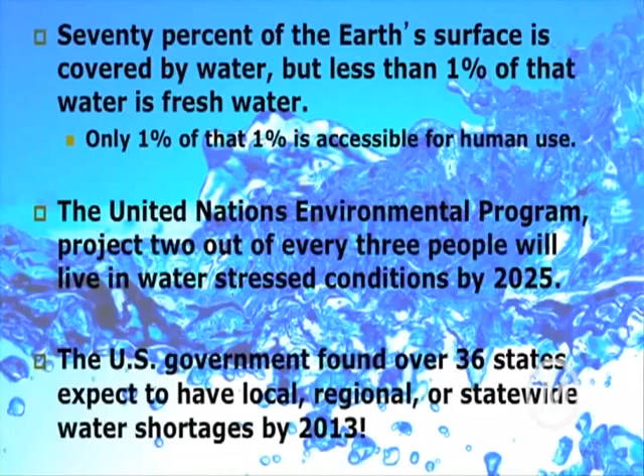The United Nations Environmental Program projects 2 out of every 3 people will live in water stress conditions by 2025. That doesn't sound as far away anymore. And the U.S. government found over 36 states expect to have local, regional, or statewide water shortages by 2013. That is scary. 2013, 3 years away.

So we need to think differently. If we have water dropping down from the sky, let's maybe think about how we can reuse that in a smart, sensible way. Why not? We just need to implement it.

Water savings equals energy savings. Once again, don't think of things in an isolated way. Thinking about how they affect each other is very important. So you reduce water usage in a building, you have energy savings because you're not having to pump, treat, and heat that water. So if you're reducing how much you're using, you're saving a lot of energy. So you're lowering your water and sewage fees if you're reusing rainwater.

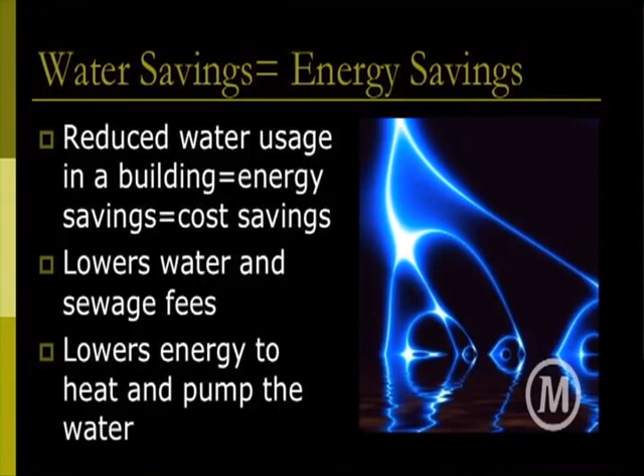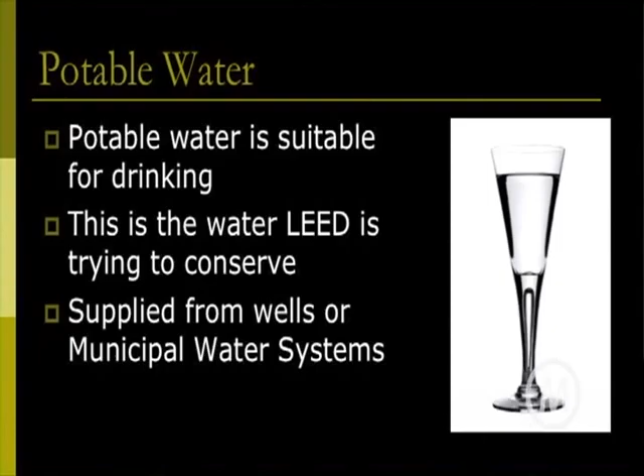Many benefits. So I've been throwing around the term potable water, and that is the water that is suitable for drinking. Well, it's stuff that comes in our glass. And that is that finite resource that we were just talking about. So when we talk about reducing water, we're talking about reducing the potable water we use in our buildings, in our processes, and in our daily lives.

It's our choice too, how we're interacting with the buildings. But the big picture is really how our buildings are using it, how our systems are using it, because that is such a huge amount of water. And hopefully on a municipal or city level as well, we could be recycling gray water. We'll talk about that. Even on a city level, that's something that Dubai actually did do sustainably.

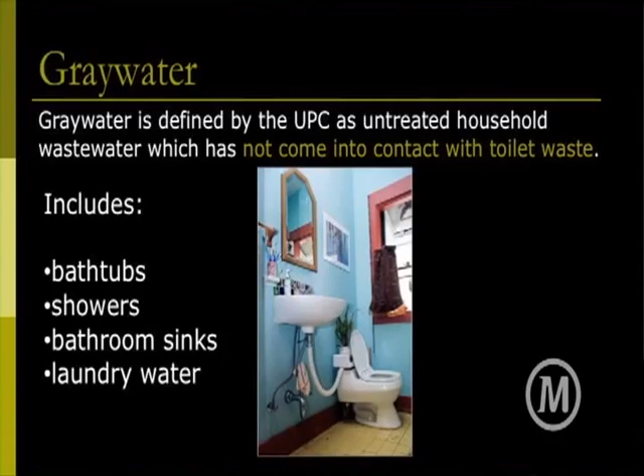So gray water, what is it? It is defined in a few different ways. It is based on your code, local jurisdiction, what's considered gray water. But basically, it's something that hasn't come into contact with toilet waste or even really just any organic matter. So you typically don't include a kitchen sink or a dishwasher because then you have that organic food as well, and that can be a problem or harder to treat.

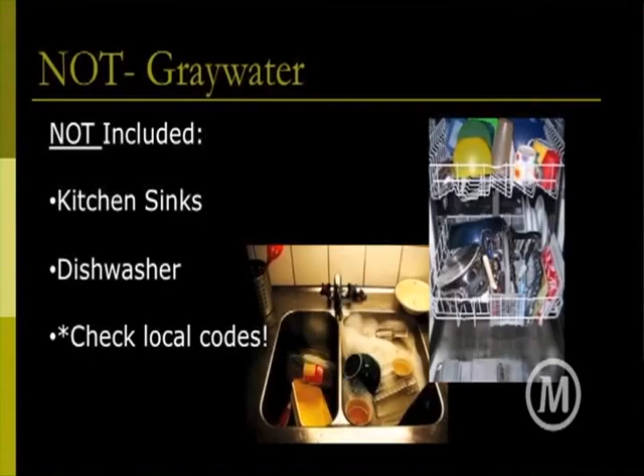So we're talking about, in the context of LEED, bathtubs, showers, bathroom sinks, maybe laundry water. Not gray water: kitchen sinks, dishwasher. Check with your code.

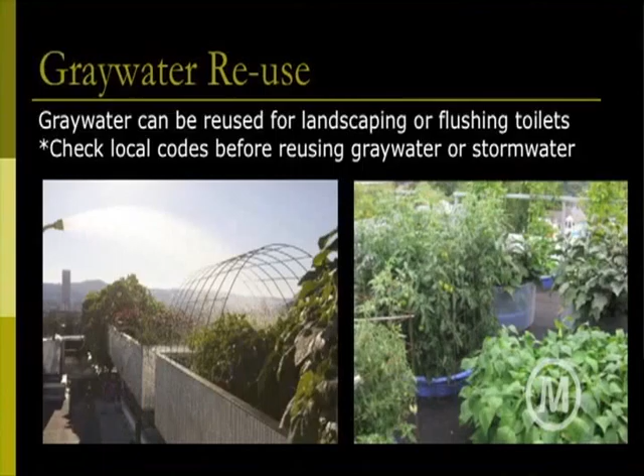Gray water reuse, there's a lot of opportunities for this. Treat it, and it doesn't take much treatment before you could reuse it for some irrigation. Or treat a little bit more, and all of a sudden we can use it for flushing our toilets and bring it back into the building. Maybe we're power washing our cars or our houses with it. Maybe janitorial uses, wide range. We'll look at how we can actually use it for our processes as well.

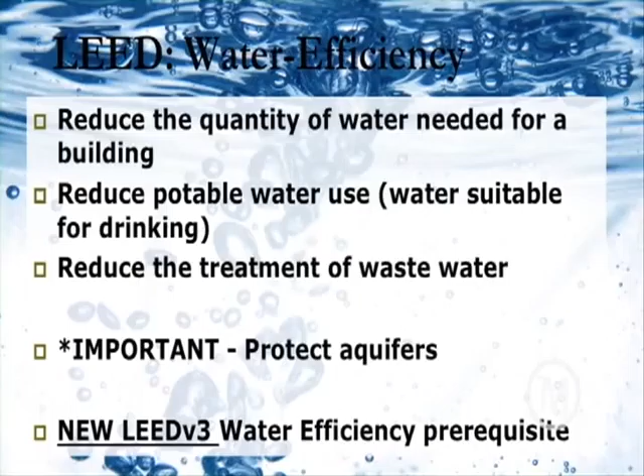So the category in LEED about water efficiency is really about reducing the quantity of water needed for the building, its processes, people, and we're really concentrating on potable water, which is our water bowl that we drink, and reducing the treatment of wastewater. So that's also an expensive thing. Everything we're flushing down the toilet is taking energy and money. So reduce how much waste, or treat it on site.

So new to LEED 2009 is this prerequisite for water use reduction. So since it's a prerequisite, it's required for every LEED building to achieve. Before, there was not a prerequisite in this category. So this is where we start seeing this changing, adapting to the needs in the industry and for our society.

The requirement is 20% less water than the water use baseline. Once again, we have to be comparing against something, or anybody can say they're reducing something. Well, reducing against what? Using a whole lot of it, and they're using a little bit less? What are we actually comparing against?

That's what LEED is good for, a universal tool for actually saying we reduce it by 20% based against the Energy Policy Act. Something that we can all identify with, we can look up that standard and see how much water that actually means. So you're using a universal metric and you're getting checked.

So included fixtures are water closets, urinals, lavatories, showers, kitchen sinks, pre-rinse valves. We're not talking about process water that come from systems: commercial steam cookers, dishwashers, clothes washers, automatic commercial ice makers. So we're talking about these uses here. WaterSense is something that's affiliated with the EPA, and it's a really good resource to compare a lot of different options if you're looking for low flow fixtures.

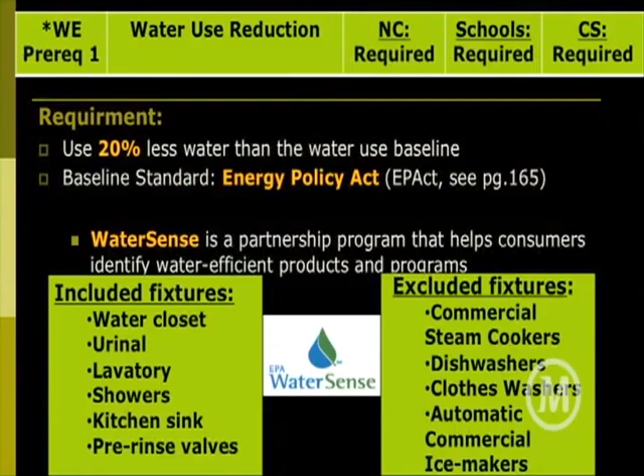So calculations, baseline case, water use in a conventional building, landscape or water fixture. So we're looking at irrigation and our water use in the building. So the water reduction percentage is based on total water consumption rather than individual fixtures. That's just how you would do the calculation.

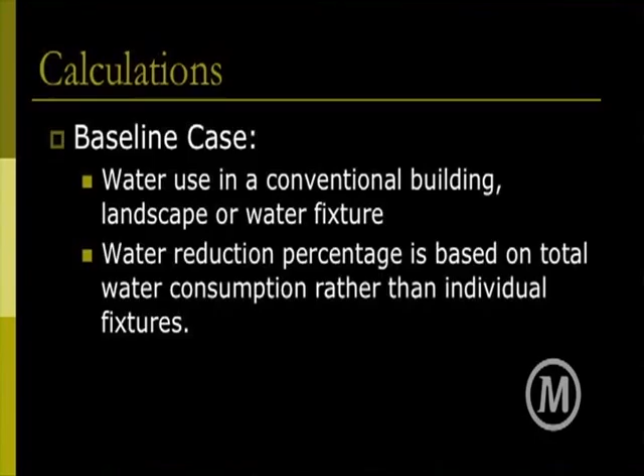Rainwater harvesting, many synergies with rainwater harvesting. So Portland receives between 3 and 4 feet of rainfall annually, about. So we could really be using this for quite a few things.

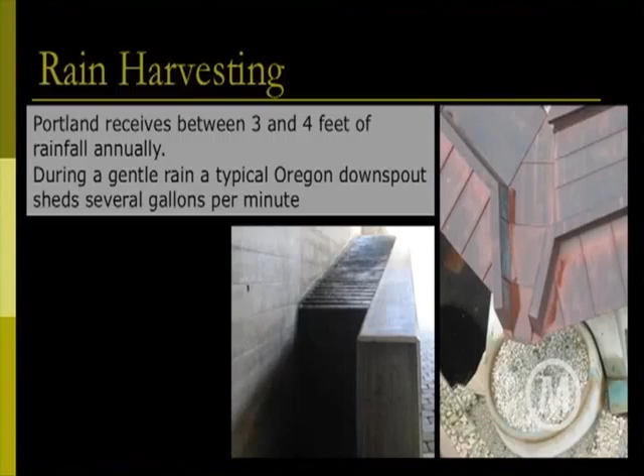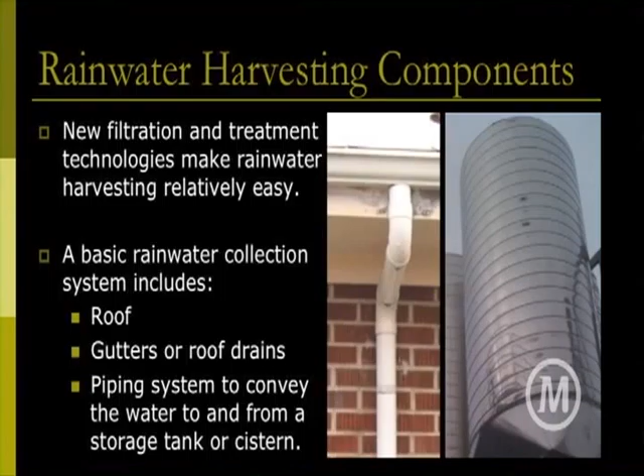Components: typically you've got your roof. It needs to be draining towards the gutters, which need to be sloped at a certain angle to make it drain quickly enough to not collect water and let things like mosquitoes collect in there. So you have screens and things that protect these systems if you're reusing this water.

So there are things to think about. You don't just shoot the gutter into your house. You have to actually think about what we can do to prevent any contaminants or things growing in these areas. So a piping system can convey the water to and from a storage tank or cistern.

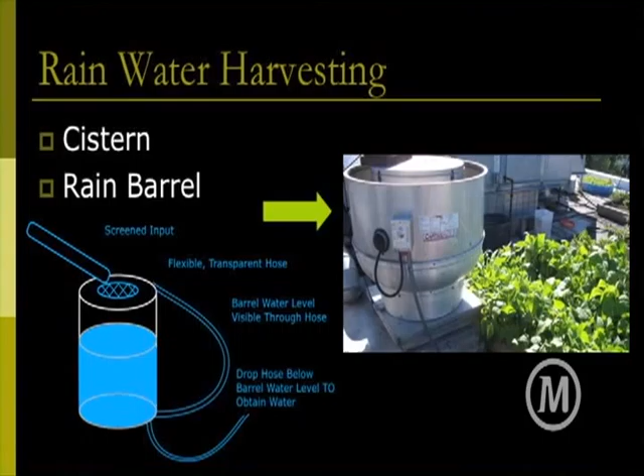So if you're going to pump it back into your house, you need to have a system in place for that. Here's an example of a diagram of a rain barrel or a small cistern. We see this in Northeast Portland quite a bit. You have just this screen input area, getting rid of those big debris. If this is just for irrigation, you're just going to remove that initial contaminant, and then you have a flexible hose where you can see the water line, and it can be used for irrigation purposes.

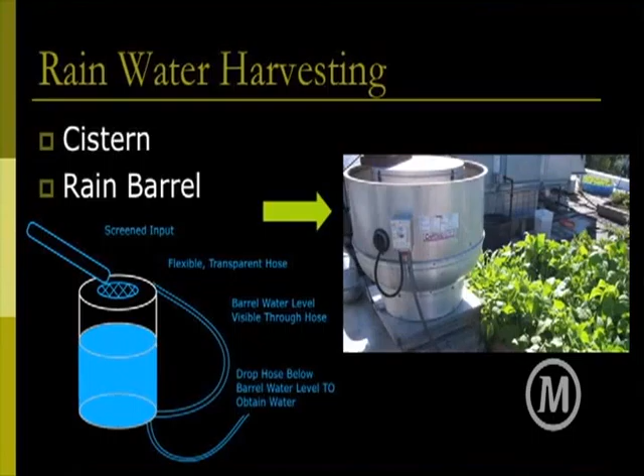Rain barrel, cistern being the larger application. So here's a little diagram of installing those components possibly.

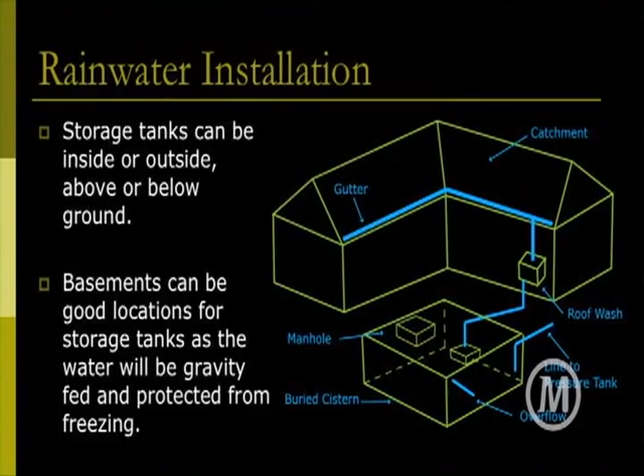So storage tanks can be inside or outside, below or above ground. This is an example of it being below ground. So if you're in an area that maybe freezes over, it's good to protect it. And also it can be gravity fed, using less energy.

So basements are a good storage area. Here the gutter is funneling all down to that cistern in the basement. Just one way to do it. You can put these in many different places - bury them, showcase them in the middle of your building, whatever your preference is.

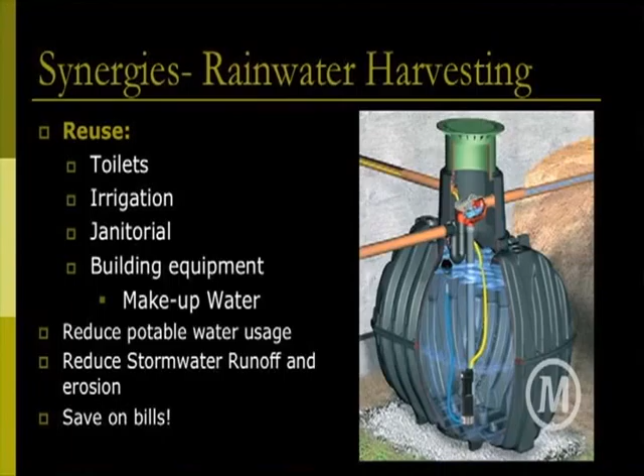So here's an example from rainwater harvesting systems. They have this integrated approach to some of the rainwater harvesting devices that they supply. This is an example of everything in one system here and how you pump and treat the water. And then it could be reused for a variety of things once you have a system like this that's actually treating the water further than just that initial screen or water diversion.

So you can use it for toilets, irrigation, janitorial, building equipment. We'll talk about how it can be used for makeup water, huge waste, all these unseen things we don't think about. But there's potable water being used for really unnecessary things. So we can reduce potable water usage in many ways.

And once again, save on bills. We're looking at economics all the time as well.

Cost-benefit analysis. This is if you want a green roof, but you also said, I just want to do every sustainable thing I can do. So I'm going to do a green roof, do rainwater harvesting, I'm going to do everything on my roof I can fit on there. Well, that's great, but you just have to make sure you know what you're doing.

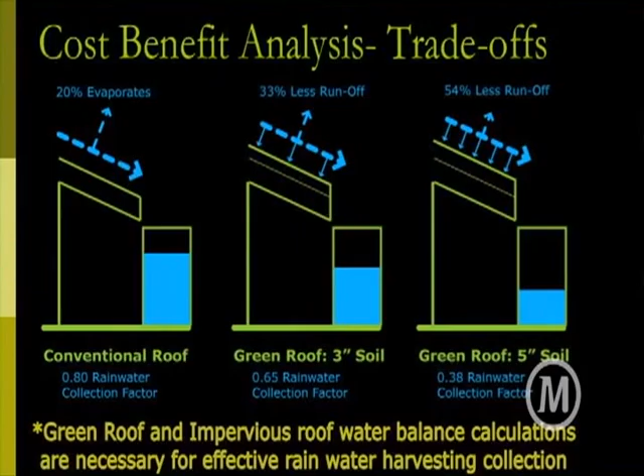And you have to do water balance calculations because the green roofs are going to reduce how much rainwater you can collect. So if you're trying to flush your toilets, you have to know how much you need in order to do that and when you're going to possibly run out.

So green roofs are great because we're reducing stormwater runoff, natural evapotranspiration going on, but because of that, you're collecting less rainwater. Conventional roof has a 0.8 rainwater collection factor, green roof 0.65, and this depends on soil depth as well. With more soil on the roof, like 5 inches, all of a sudden it's 0.38 rainwater collection factor. So that's cutting over half.

Water efficient landscaping: 2 to 4 points is in orange, more heavily weighted in LEED 2009. So there aren't a lot of credits in the water section, but they are more heavily weighted now. It's reducing potable water usage for irrigation by at least 50%, using strategies we talked about - capture rainwater, you could recycle wastewater once it's treated, and maybe reuse gray water.

Plant species is important - once again, native planting. We should try to do what nature was doing on our site as much as possible, because nature kind of has it figured out. So when we're talking about vegetated space, we're talking about native plantings.

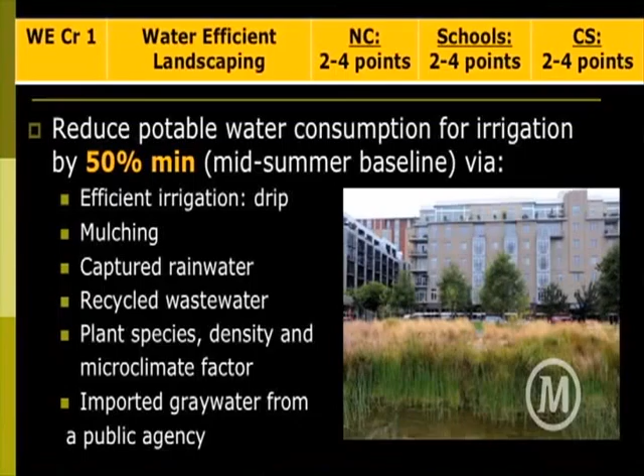Or maybe adaptive plants that weren't there originally, but can be there and not be a big maintenance issue - they don't need irrigation, they're going to survive and thrive. So adapted is not there naturally, but can survive well. Native was already there and can thrive - it was meant to be there from the beginning.

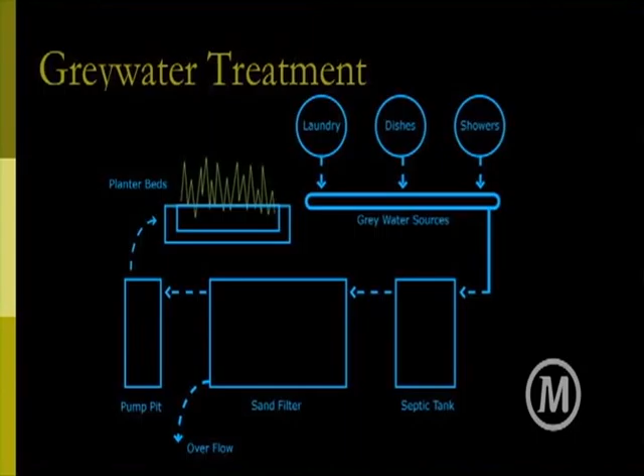So the important thing to do right away is to understand your site, understand the ecology of the area, and pick those plants. But not everybody has to be experts on each one of these things. Know that you should talk to a landscape architect or someone that understands that. It's really about knowing what to look for, not falling into some pitfalls where somebody tells you they have a product that solves all the problems and you don't know what questions to ask.

That's what we're talking about. You don't have to be an expert in each one of these things. Just being familiar is important.

Gray water treatment: so here we have laundry, dishes, showers funneling in - and dishes probably wouldn't be included in most jurisdictions. Coming down through a septic tank, sand filter, could be some overflow, but now it's been treated quite a bit, so it's just being infiltrated.